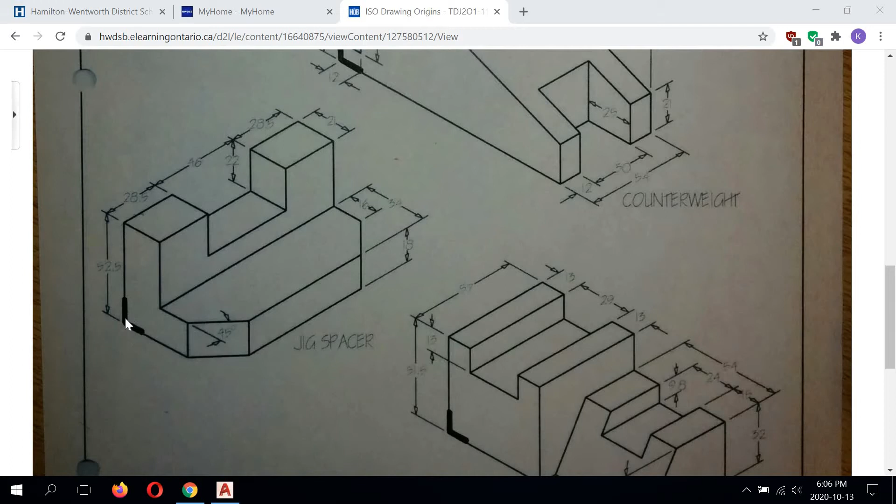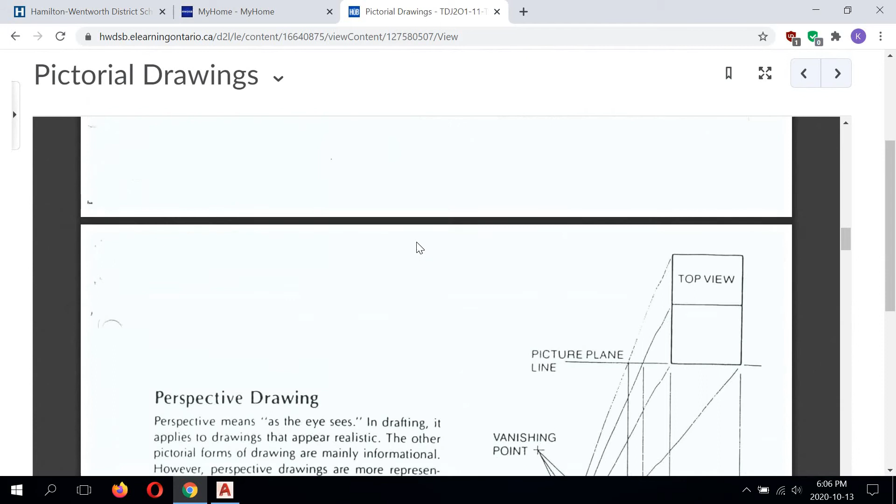I'm going to be going back and taking a look at the source of this that I'm going to be using for my iPad. And that is this one right here, which is much more clear and brighter. So this is the one I'm going to be referring to as I draw this.

So I'm going to get started. I've already downloaded the jig spacer border and I'm ready to begin. Polar is set to 30 degrees. So here I go.

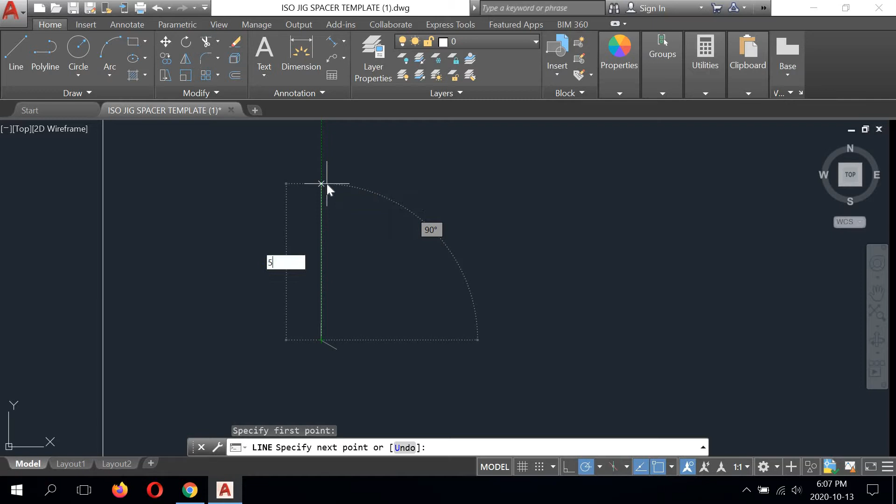Line, endpoint at the origin, up on Y 90 degrees, typing in 52.5. Going to be drawing a line on X 30 degrees at 28.5.

On 30 degrees, coming forward, a value of 21. And then down on Y, 22.

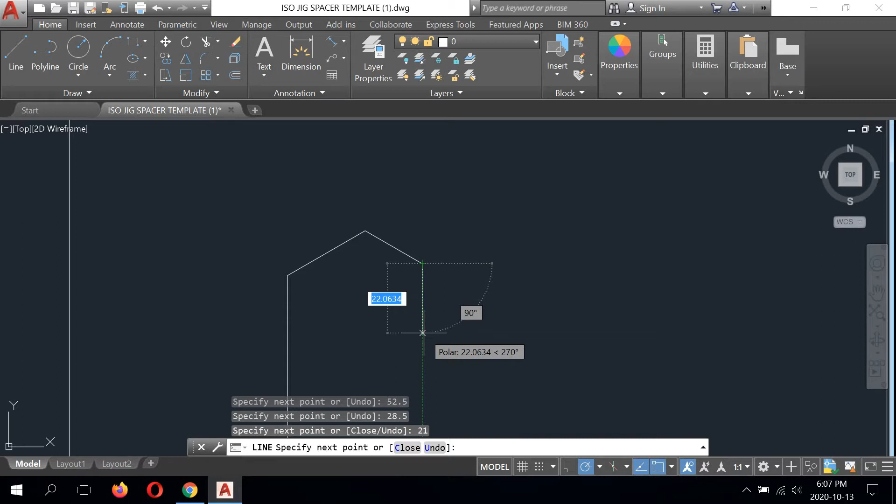Continuing on 30 degrees at a value of 46. Up on Y, 22.

30 degrees, a value of 28.5. Back on 150 degrees, a value of 21.

On 150 degrees, coming back on X, 28.5. And then down on Y, a value of 22.

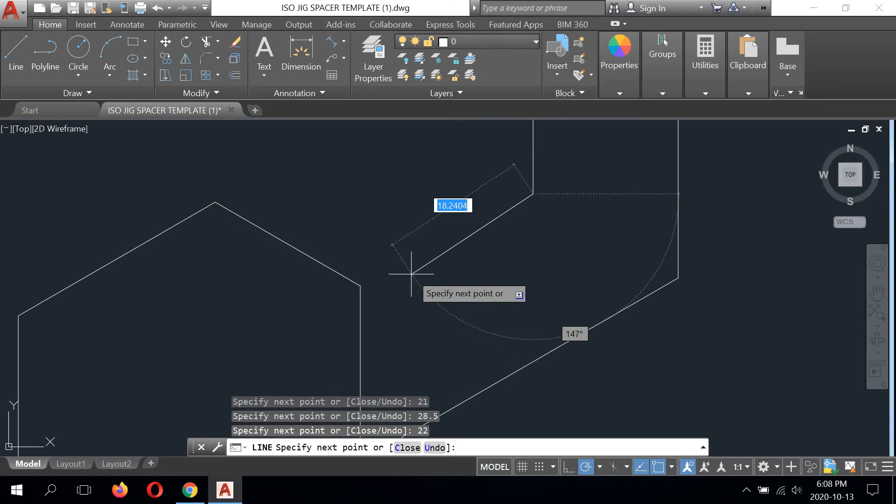And then we're going to continue on. Now, I don't need to key this distance in. This is going to run out right here. So you need to make sure, if you're going to click this intersection, that the angle is correct. And the angle must be 150 degrees, as you see here.

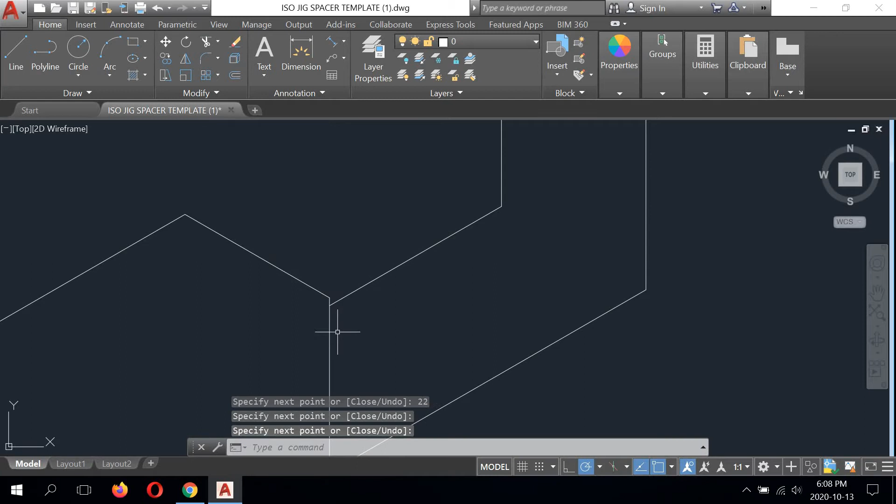When I see that, I can left click the intersection, and the line is what it needs to be. I can also draw a line from here to here, and I can copy it from here to here.

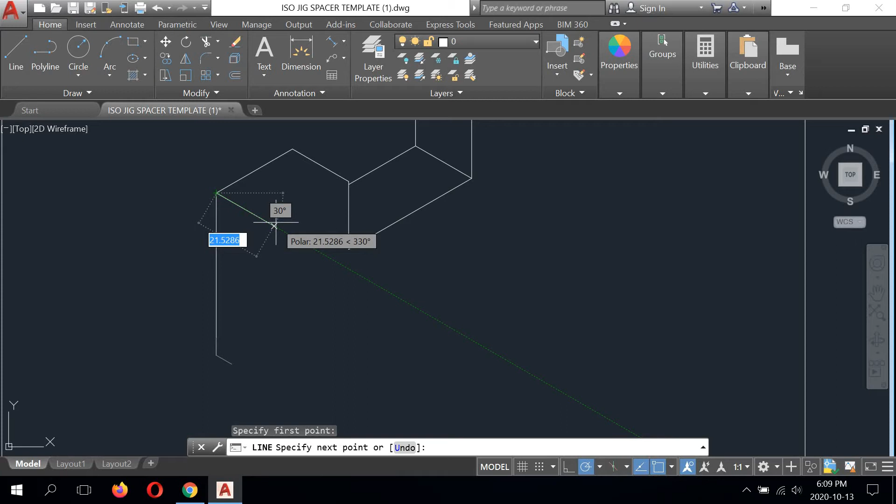I can draw a line from here, come forward 21, and do the same thing. I'll copy this one from here to here for a change.

All right, so I'm coming down on the right side, and this line here is not given. So I know that the height is 52.5, and I know that the height of the base extrusion is 18. So if I subtract this number from 52.5, I'm going to get 34.5.

So I'm going to key that in, hit enter, and come forward on 30 degrees. But I'm not going to count the chamfer. I'm going to pretend that the chamfer is not there at this time. And I'm going to come forward the full 64.

And then come down the thickness of the base, which is 18. Continue on the length.

Now, this should be 103. If we add up the length of this face, the length of this one, and this slot, it should be 103. 28.5 times 2 plus 46 is 103.

So we'll just key that in. And then that will bring us right back to the endpoint where we started.

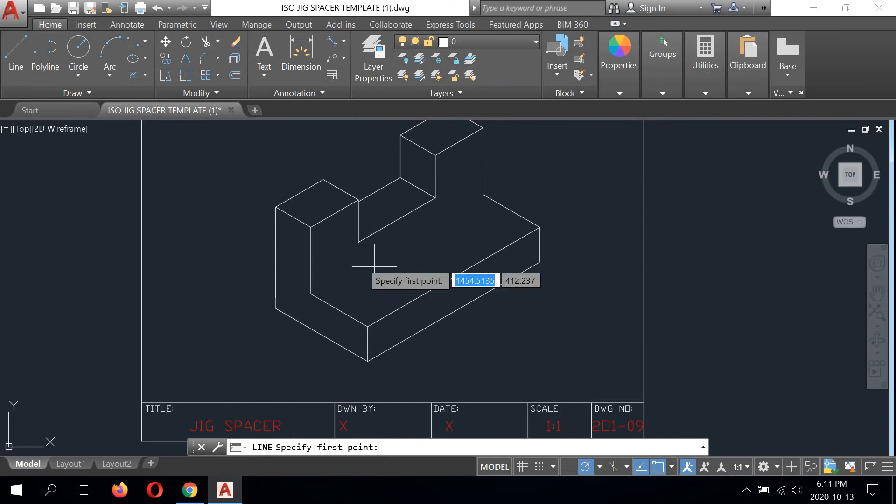We can draw a line from here up, 18. Draw a line to this endpoint. And we can draw a line from here, 34, and come right back up to the top here. We also need to include a line from here to here.

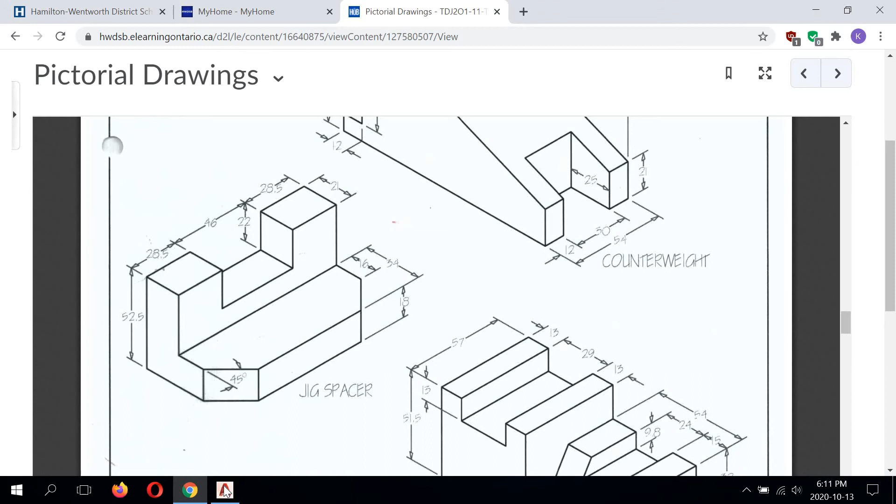All right, so probably the easiest way to do this would be to basically redo this line or grip it back, because this from here to here must be 16 according to this. So what I could do is basically erase this line or delete it.

Draw a line from here, now 16, and then come on X, 0, to this intersection, because 45 degrees on the left side of the jig spacer will appear as 0 degrees. 45 degrees translates to 0 in isometric, and it's going to be 90 degrees on this side.

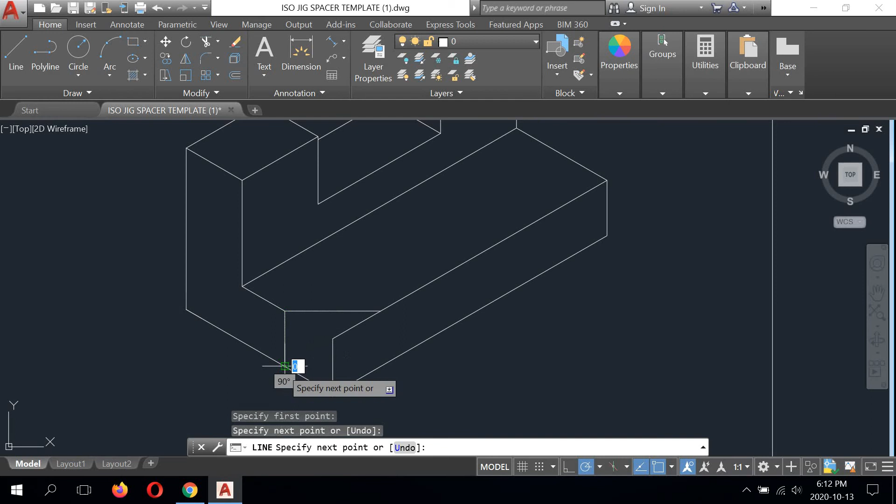So I can draw a line from here down, and a line from here to this intersection, and then back up like that.

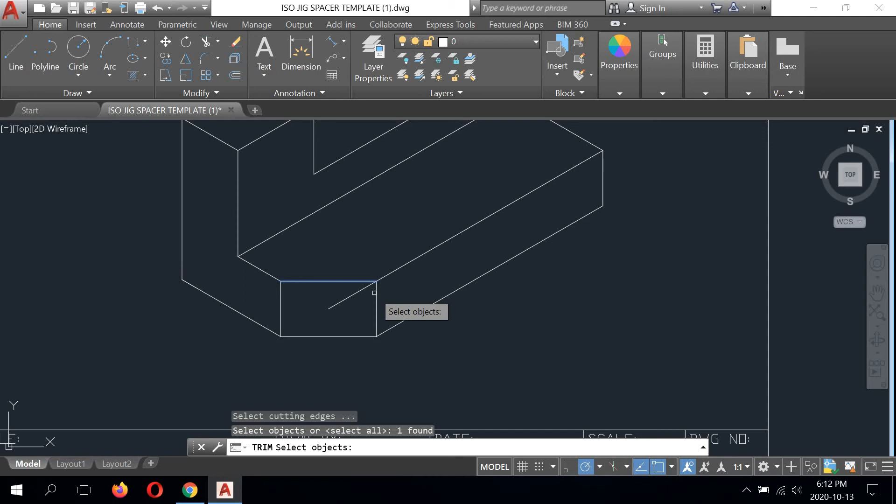And then we're going to be doing some trimmings here. So we're going to select here, trim this away. This line here is going to erase, and we can trim this one.

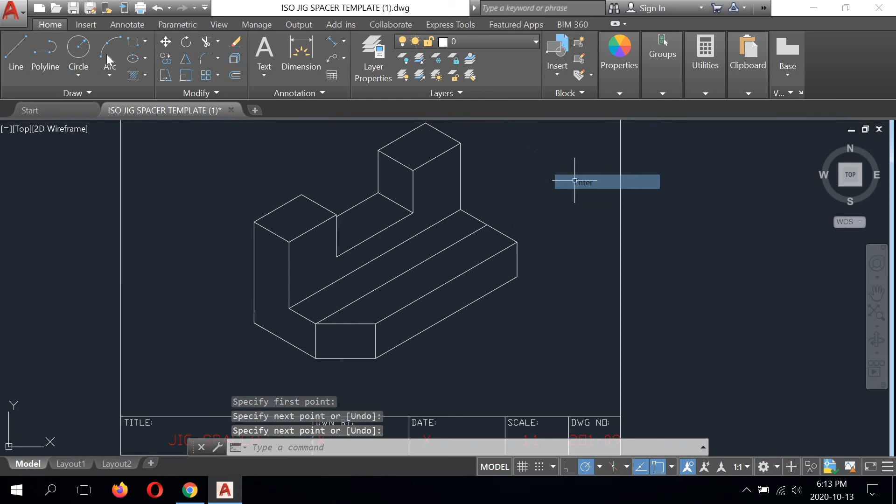And what we can also do is run a line from this endpoint up on 30 degrees to this intersection. Make sure you're on the isometric angle, which is 30 degrees. Click. And then we'll draw a line from here down.

To this intersection. Now this line will erase, and we're going to just trim the rest.

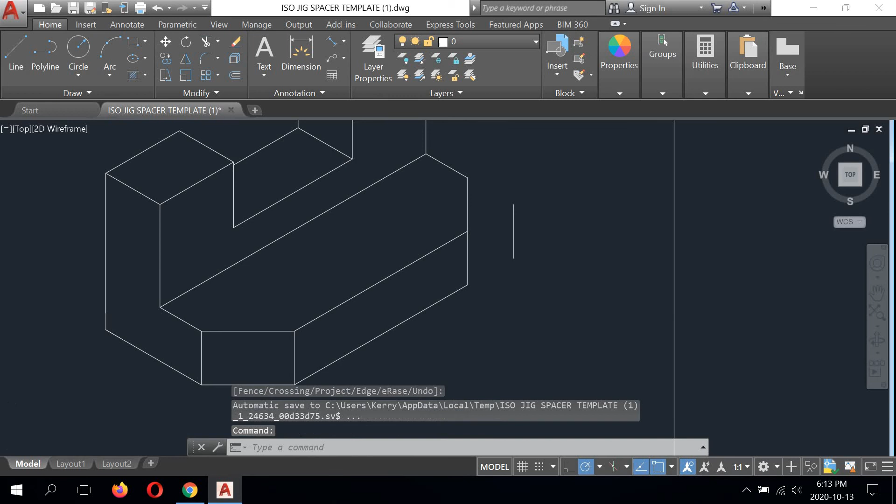So we're going to select the trim, the boundary, and then lastly, this line here will erase. Pretty fast.

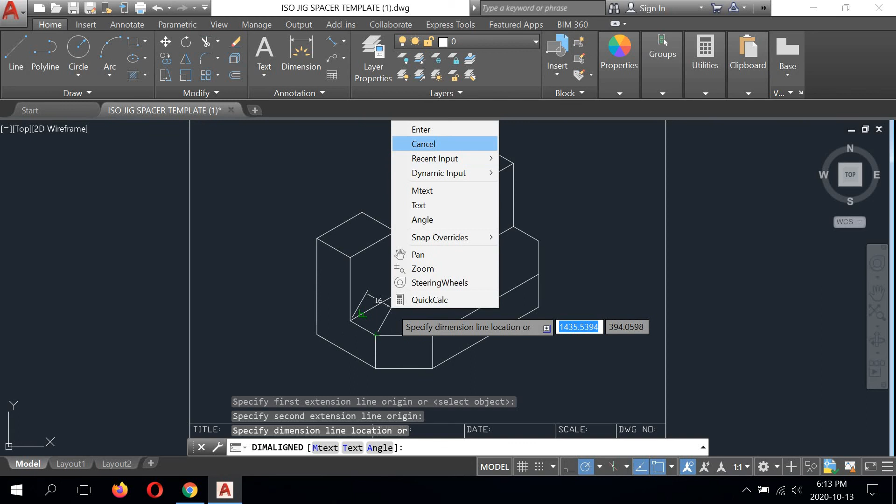And just to prove a couple of things here, I could run a dimension that's aligned here, and I should get 16, and I do. I should be able to do the same thing on this side. Let's check it. Yes, I do.

All right, and that is one way to complete the jig spacer.